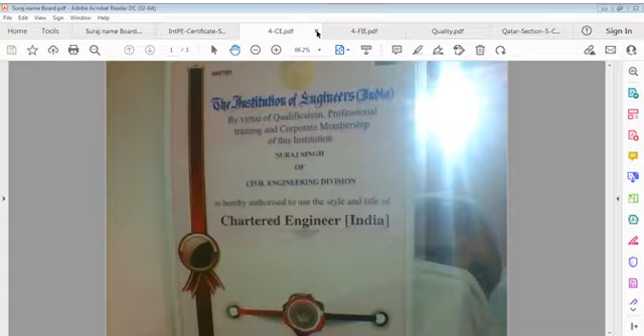I'm interested in people who are serious in life. This is a competency certificate, called the Professional Engineer Certificate at an international level, and this is the Chartered Engineer Certification, as well as fellow membership of the Institution of Engineers. I have explained this many times. We have the issue of quality in works, quality in life, and also concrete, the most important material in the world.

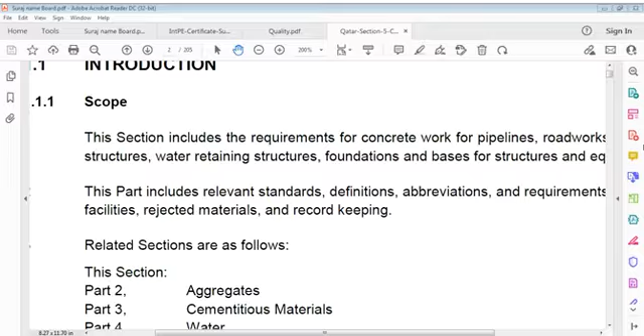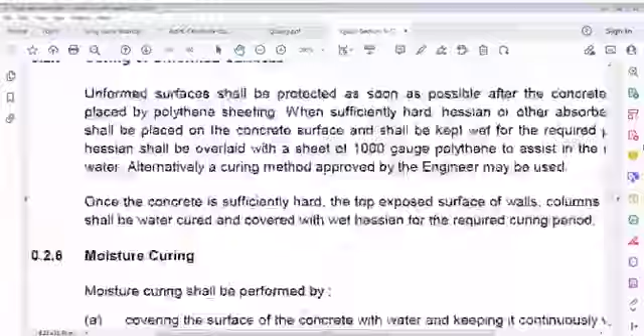Concrete, we have gone through many pages of this. This is very brief, in fact, not very explanatory yet. These are references, and they are important in this file. I think we were somewhere here, talking about some testing, water testing. We are going to reach there. We've gone to somewhere around 129 or 138.

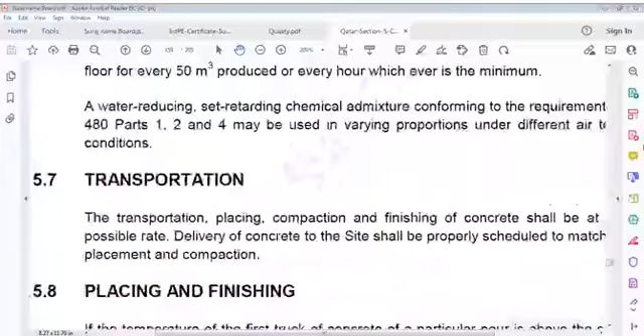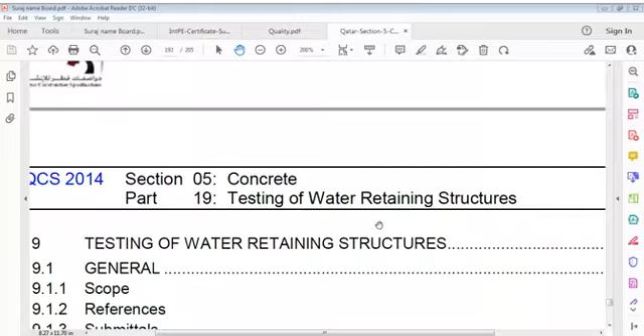I start with this because maybe we did something on this, but time has gone, and maybe I have to refresh that one. And it is grouting, etc. We have done, so leave it. Now I'm going to start with this page, 190. Alright, concrete testing of water retaining structures, and that's where we have to do concrete testing.

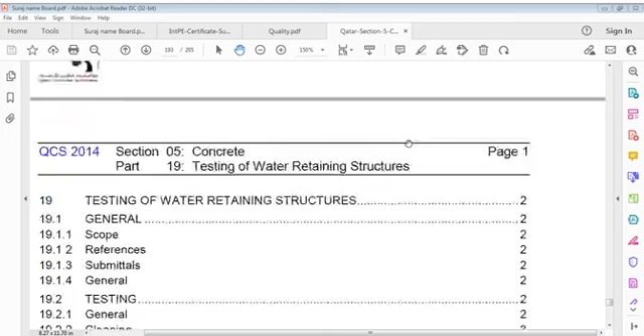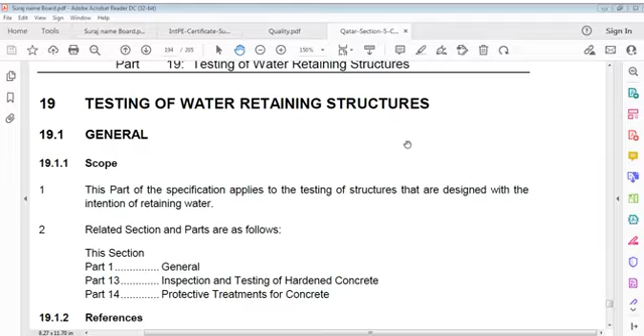In this, if you see the contents here, it's general: scope, references, submittals. In general testing: general, cleaning and testing procedures, walls, roofs, disposal of water used for testing. And of course here is general in this testing of water retaining structures. This part of the specification applies to testing of structures that are designed with the intention of retaining water, and the related sections are as follows.

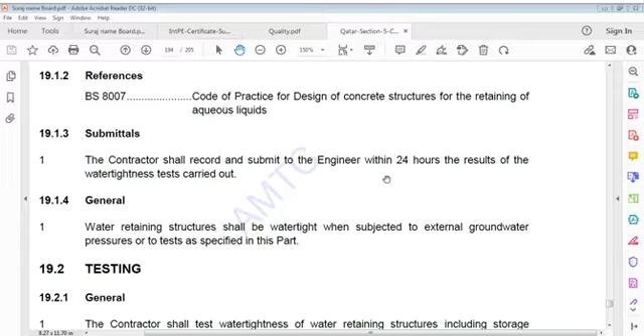You can say general inspection and testing of hardened concrete, protective treatments of concrete, and BS 8007, which is the code of practice for design of concrete structures for retaining aqueous liquids. Submittals: the contractor shall record and submit to the engineer within 24 hours results of water tightness tests carried out. General: water retaining structures shall be watertight when subject to external groundwater pressure or to tests as specified in this part. I'm just reading it because I explained it to you before, and if required I explain as such.

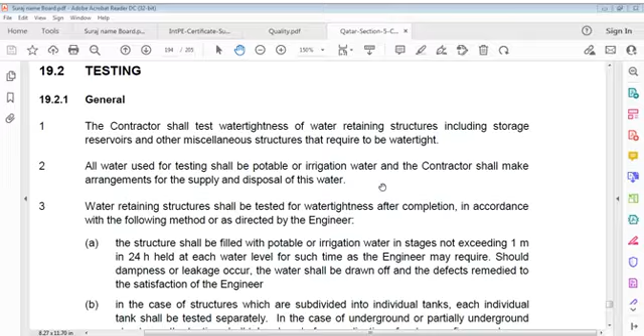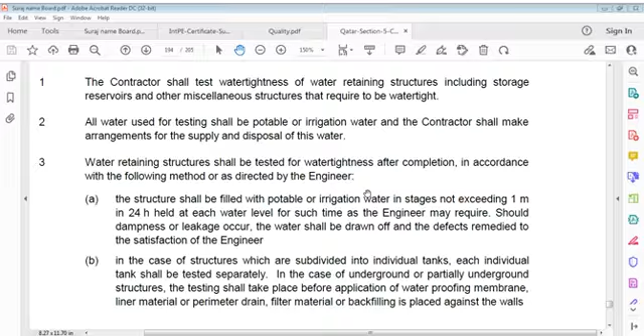The contractor shall test water tightness of water retaining structures, including storage reservoirs and other miscellaneous structures that require to be watertight. All water used for testing shall be potable or irrigation water, and the contractor makes arrangements for supply and disposal of this water. Water retaining structures are tested for water tightness after completion in accordance with the following method as directed by the engineer. You see, when I say directed, or something to be done with the engineer, you have to be clear about this.

Here engineer, again I repeat, does not mean site engineer. Engineer here is a designation, it's a contractual title. It's always mentioned in the contract. This means the engineer who is responsible for supervision of the job, who is responsible on behalf of the owner or client, who is responsible for finally authorizing work complete or an item complete or done according to requirements. It is that position. It's not something ordinary. It is, you can say, a legal position. So be careful about this when I say engineer.

A structure shall be filled with potable or irrigation water in stages not exceeding 1 meter in 24 hours. That is the limit. We should not fill the reservoir, that tank, more than 1 meter in 24 hours. And then it is held at each water level for such time as the engineer may require, and also as the codal requirement mandates. You have to see the code and read it. This is particularly BS 8007, or the equivalent Eurocode you can consider.

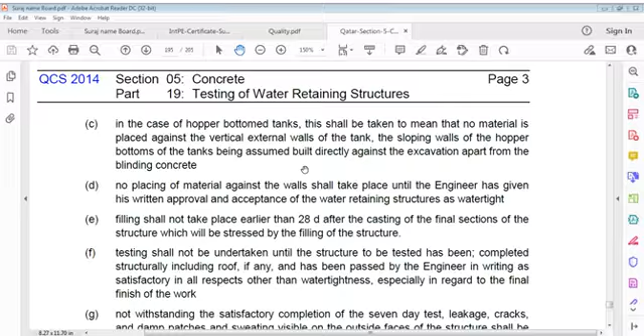Sloping walls of the hopper bottom of the tank are assumed built directly against the excavation, apart from blinding concrete. No placing of material against walls shall be effected until the engineer has given his written approval and acceptance that water retaining structures are watertight. Try to get this point. The engineer has to finally approve and accept the water retaining structures as being watertight.

Filling shall not be effected earlier than 28 days after casting of the final section of the structure. There is a 28-day requirement before filling is done. Filling shall not be effected earlier than 28 days after casting of the final section of structure which will be stressed by filling of the structure.

Testing shall not be undertaken until the structure to be tested has been completed structurally, including the roof if it has one, and been passed by the engineer in writing as satisfactory in all respects other than water tightness, especially in regard to the final finish of the work.

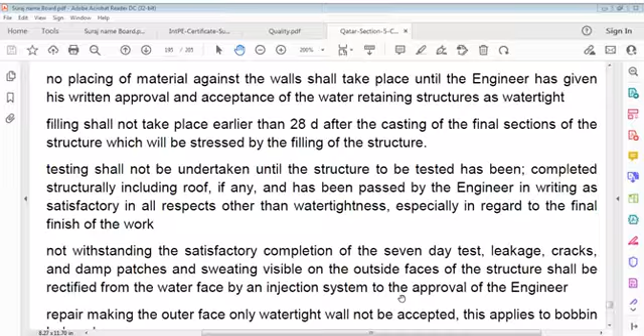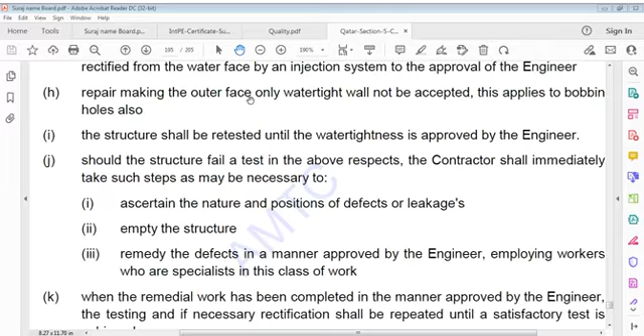Notwithstanding satisfactory completion of the 7-day test, leakage, cracks and damp patches visible on the outside faces of the structure shall be rectified from the water face by an injection system to the approval of the engineer. Repair making the outer face only watertight shall not be accepted. This applies to bobbin holes also. The structure shall be retested until water tightness is approved by the engineer.

Should the structure fail the test in the above respects, the contractor shall immediately take such steps as may be necessary to ascertain the nature and positions of defects or leakage. You have to make sure where the leakage exists. Empty the structure. Remedy defects in a manner approved by the engineer, employing workers who are specialists in this class of work.

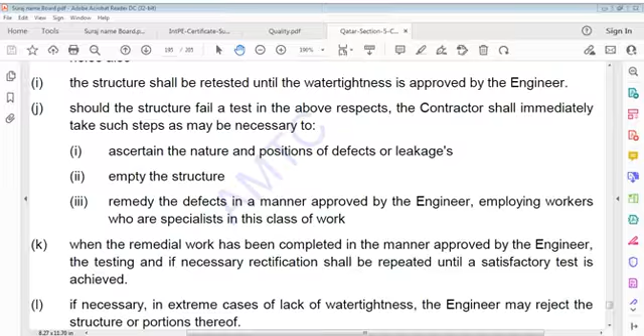Be clear, even after remedial action is effected, you have to test again. If there is another leakage, you have to do it again and again until you get a satisfactory test. In extreme cases of lack of water tightness, the engineer may reject the structure or portions thereof. Very serious matter. In case it is not found watertight, the engineer will reject it or a portion of it. Do it again.

And then we say cleaning. All water retaining structures shall on completion be carefully cleaned of all debris to the complete satisfaction of the engineer, as follows. This process is telling about cleaning for the purpose of testing.

All internal faces shall be brushed down with a stiff broom while still dry. Clean all the walls inside using a stiff brush. Whatever debris, even very minor pieces, remove them. And all associated reservoir pipe work shall be cleaned in accordance with the requirements.

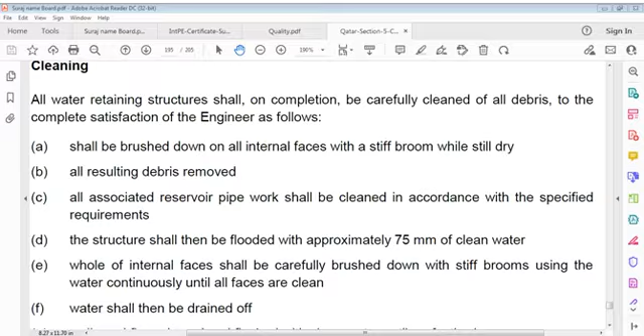The structure shall then be flooded with approximately 75 mm of clean water from the bottom. Fill it and you have to wash the walls and floors. All internal faces shall be carefully brushed down with stiff brooms using water continuously until all faces are clean. Water shall then be drained off, and walls and floors hosed and flushed with clean water.

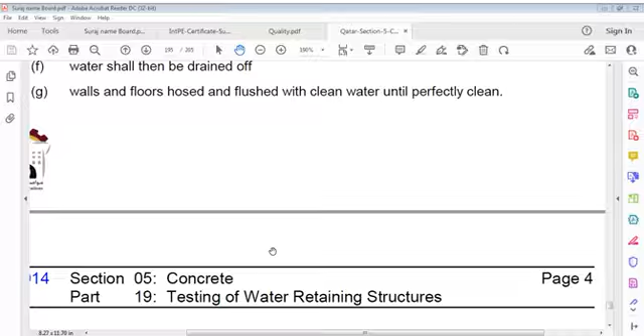After completion and cleaning of the structure and all associated pipe work, if it is there, the contractor shall fill the structure up to top water level and leave it for a stabilizing period of 21 days in order to allow absorption of water into concrete voids and autogenous healing to take effect.

This means complete saturation of the volume of concrete so there is no delay in transmission of water through these voids. So after cleaning the structure and associated pipe work, like in a swimming pool or treatment plant reservoirs, the contractor shall fill the structure up to top water level following the 1 meter in 24 hours principle and leave it for a stabilization period of 21 days, remember, 3 weeks, to allow for absorption and autogenous healing.

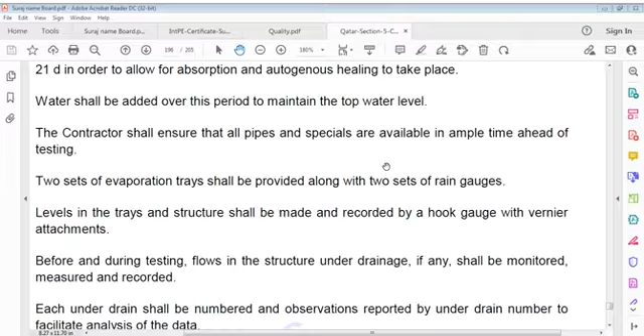Before and during testing, flows in structure under drainage, if it has, shall be monitored, measured, and recorded. Each under drain shall be numbered and observations reported by under drain number to facilitate analysis of data.

All leaks shall be repaired within 1 month of their detection. This is limiting period. On 22nd day, two shallow watertight evaporation trays. When we say on 22nd day, it is 21 days wait period, then 22nd day, two shallow watertight evaporation trays.

We talked of 21 days, that this is absorption and autogenous period. So we have to start testing on 22nd day. Two shallow watertight evaporation trays of area 0.4 meters square, let us say 1 meter by 0.4, or it can be some other size, like 0.8 by 0.5.

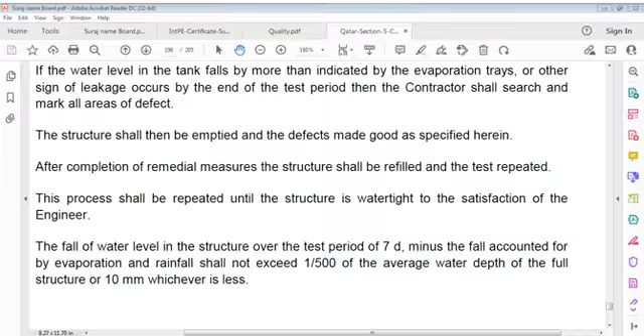Testing of water in structure. Roofs now. Roof of structure shall be tested for water tightness before laying of roof membrane. We are talking of roofs. It's not very complicated, however, but an interesting one because it is a water test ultimately. It's not a water retaining structure. It's a structure in that way only when there's rain and some water accumulates. So we are saying a water test for that is also important because water can penetrate down into the room below.

Roofs of structures shall be tested for water tightness before laying of roof membrane, which shall be guaranteed for about 10 years. Roof and fittings shall be hosed down vigorously, and this repeated in such a way as to keep the roof wet for 3 successive days.

Leaks or damp patches show in soffit. Soffit means the internal surface, or you can say the bottom surface of the slab. Roof and fittings shall be deemed satisfactory for water tightness if no discernible leaks or damp patches show in soffit. I repeat, roof and fittings shall be deemed satisfactory for water tightness if no discernible leaks or damp patches show in soffit.

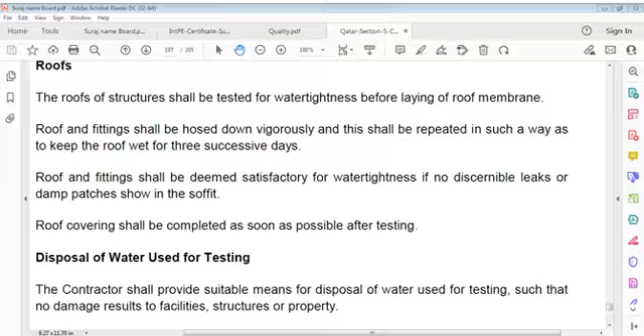Roof covering shall be completed as soon as possible after testing. Disposal of water used for testing. Contractor shall provide suitable means for disposal of water used for testing, such that no damage results to facilities, structure, or property. These means shall be subject to approval of engineer and local authorities. Details shall be submitted to engineer on request.

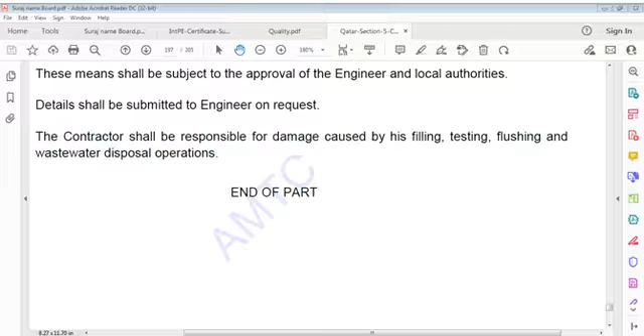Contractor shall be responsible for damage caused by its filling, testing, flushing, and wastewater disposal operations. That is the water testing we considered. So you should be very serious about this matter. Testing is very important. Now we come to part 20 of this specification, and that is personnel qualifications and certification.

In this we cover personnel qualifications: auditors, ready-mix concrete companies, technical department, production and operation department, testing laboratories, concrete laboratories department, contractors, concrete construction department, consultants, site supervision department, site supervision design office department.

Personnel qualifications and certifications. In general, qualification requirements given in this part are optional unless otherwise mentioned below. Purpose of qualifications is to prepare industry to cope with required quality of construction. Requirements shall become compulsory as and when stated by standards. So it is just their own proposal, but qualification is a requirement and it is not optional as far as I am concerned, but let us say it is a general statement.

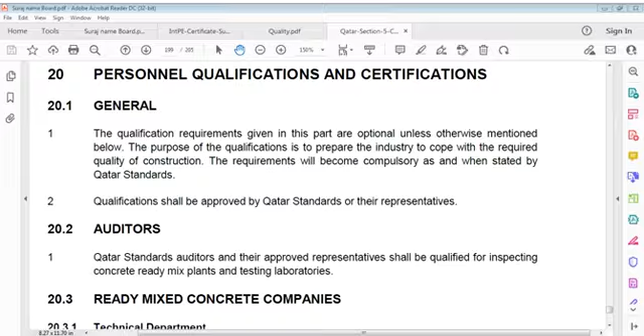So we are talking about RMCs first, how they should be qualified. It is ready-mix concrete companies, technical department, we are talking of now. What is the position? Number one, technical manager or QC manager. Now, what should be the qualification for the technical manager or QC manager?

Concrete specification review and concrete mixture proportioning. Concrete constituent materials, characteristics and effects on concrete properties. Fresh and hardened concrete properties. Durability of concrete. Production and delivery of ready mix concrete. Handling, placing and curing of concrete.

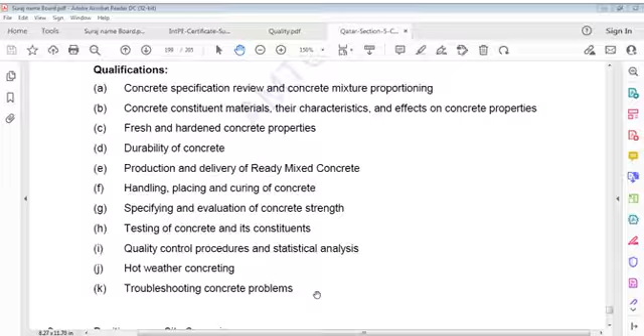Specifying and evaluation of concrete strength. Testing of concrete and its constituents. Quality control procedures and statistical analysis. Hot weather concreting. Troubleshooting concrete problems. This is for technical manager, QC manager, and actually this is like a job description related qualification: your technical manager, QC manager should know what the concrete specifications are and review them from time to time.

What is the concrete mixture proportion, say ingredients. They have designs of concrete ingredients, and that we have to keep reviewing because materials are never constant. They keep on changing from time to time. So that is what that design mix is.

How many kilograms of cement you have to use, and how many kilograms of cement you have to replace with supplementary cementing material like PFA, GGBS, or microsilica. That is called replacement of cement by these supplementary materials, so that concrete becomes more quality related, and cracks may be avoided using this pozzolanic material proportioning. And how many kilograms of water to be used, and how many kilograms of whatever else is required, maybe admixtures or plasticizers. All that is a part of specification.

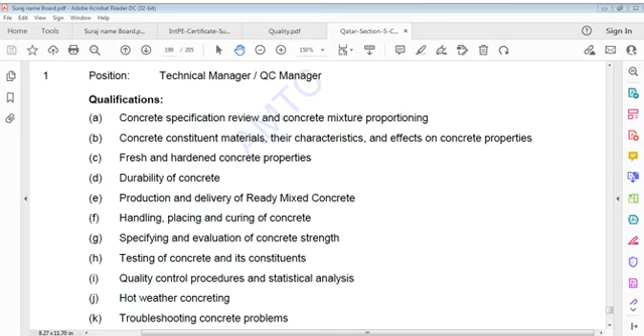Quality control procedures and statistical analysis. Hot weather concreting, these are very important points. Quality control procedures are involved with wet concrete, from fresh to hardened. Hot weather concreting, the temperature is most important, how to maintain it in hot weather conditions. Then troubleshooting concrete problems.

So what is the list? Again I say, concrete specification review and concrete mixture proportioning. Concrete constituent materials, their characteristics and effect on concrete properties. Fresh and hardened concrete properties. Durability of concrete. Production and delivery of ready-mix concrete. Handling, placing and curing of concrete. Specifying and evaluation of concrete strength. Testing of concrete and its constituents. Quality

Supervisor shall be capable of satisfactorily reading, understanding and performing below fresh concrete tests.

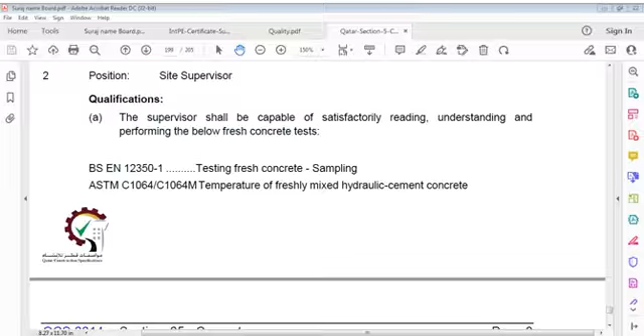Supervisor shall be capable of satisfactorily reading, understanding and performing below fresh concrete tests. What is testing fresh concrete? Sampling fresh concrete. You know the slump test, temperature, and air voids. We generally test all this. So testing fresh concrete, sampling, temperature of freshly mixed hydraulic cement concrete. Testing fresh concrete, slump test. Testing fresh concrete, density.

Testing hardened concrete, making and curing specimens for strength tests. Standard test method for slump flow of self-consolidating concrete. Self-consolidating means there is no requirement of applying a vibrator. Automatically it settles and densifies. There is no need of compaction in this case. Actually, they call it self-consolidation, but it's actually self-compaction.

Now, the position is laboratory supervisor. Laboratory supervisor is a technician in the laboratory, and it's a very important, technical position. Hold on. Lab supervisor. Qualification is lab supervisor shall be capable of satisfactorily reading, understanding, and performing these fresh and hardened concrete tests.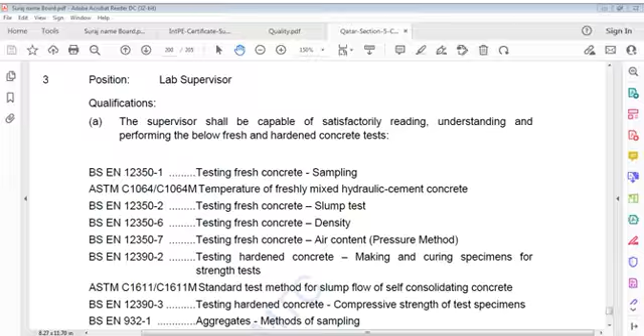Method of sampling, and in that same way you can say the methods of reducing laboratory samples, and determination of particle size distribution and dust content. This is for aggregate: the method of reducing laboratory samples and determination of particle size distribution and dust content.

Aggregates, determination of particle density and water absorption. And aggregates, also determination of loose bulk density and voids. Method of determination of moisture content. So how many points are there? Let us see, because it is for the laboratory one. Here

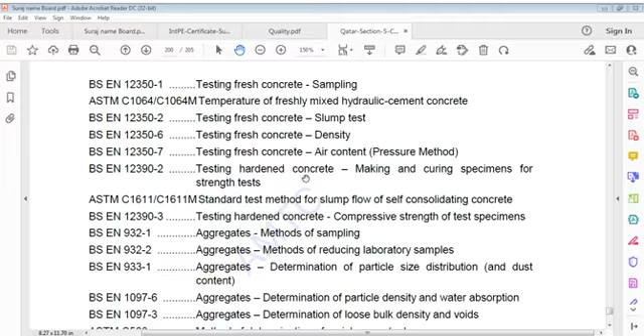you can say testing fresh concrete sampling, temperature of freshly mixed hydraulic cement concrete, testing fresh concrete slump test and density, testing fresh concrete air content pressure method, testing hardened concrete making and curing specimens for strength test, and standard test method for slump flow of self-consolidating concrete, testing hardened concrete compressive strength of test specimens, aggregates method of sampling,

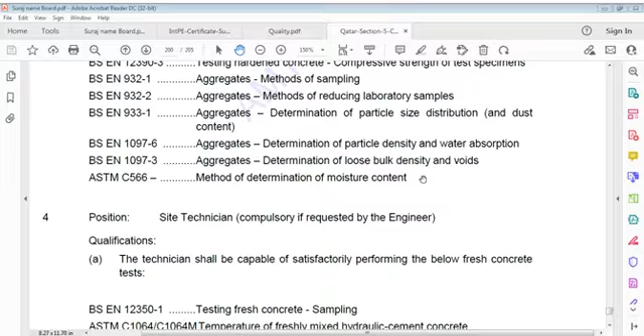aggregates method of reducing laboratory samples, aggregates determination of particle size distribution and dust content, aggregates determination of particle density and water absorption, aggregates determination of loose bulk density and voids, and method of determination of moisture content.

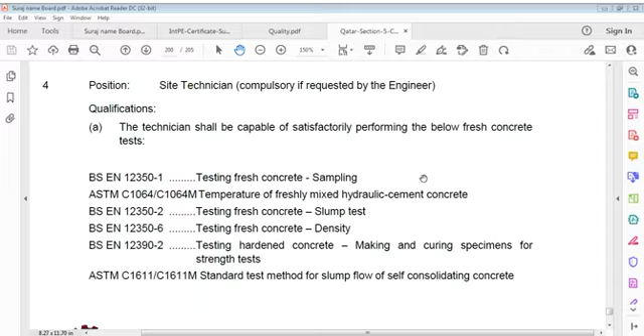Again, this is the site technician, compulsory if requested by the engineer. The technician shall be capable of satisfactorily performing the below fresh concrete tests. What's that? Now which site was that? A site technician, compulsory if requested by the engineer, and his qualification: the technician shall be capable of satisfactorily performing the below

fresh concrete tests, and that is testing fresh concrete sampling, temperature of freshly mixed hydraulic cement concrete, testing fresh concrete slump test, testing fresh concrete density, testing hardened concrete making and curing specimens for strength test, and standard test method for slump flow of self-consolidating concrete.

Then lab technician, compulsory if requested by the engineer, and the qualification is: the technician shall be capable of satisfactorily performing the below fresh and hardened concrete tests, and that is the lab technician. Testing fresh concrete, right? So the technician shall be capable of satisfactorily performing these tests, fresh concrete tests and hardened concrete tests: testing fresh concrete

sampling, again temperature of freshly mixed hydraulic cement concrete, testing fresh concrete slump test, testing concrete density, testing fresh concrete air content pressure method, testing hardened concrete making and curing specimens for strength test, standard test method for slump flow of self-consolidating concrete, testing hardened concrete compressive strength of test specimens,

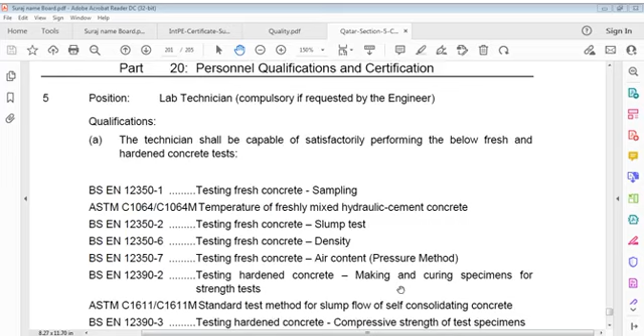and aggregates method of sampling, aggregates method of reducing laboratory samples, aggregates determination of particle size distribution and dust content, aggregates determination of particle density and water absorption, aggregates determination of loose bulk density and voids, method of determination of moisture content. Now we have the operation department.

Operation department, production and operation department, and the position is plant production or operation manager and/or supervisor or performer, whose qualification says he should have knowledge of properties of concrete and its constituents, materials management, organization, plant design,

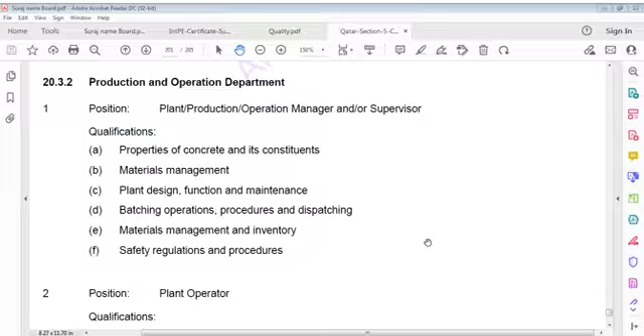function and maintenance, batching operations, procedures and dispatching, materials management or materials organization management and inventory, and safety regulations and procedures. And let's see, what's that? Plant operator. And what should be the qualification of that plant operator? Let's see what it says.

Plant operator: basic concrete properties and characteristics of its constituents, that is the job of the plant operator. Basic concrete properties and characteristics of its constituents, scales, meters and batching sequence and control system, central mixing and discharging, tolerances, overweight, underweight controls.

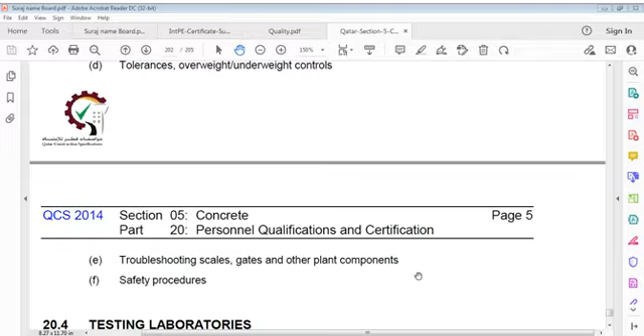Troubleshooting scales, gates and other plant components, safety procedures. So for plant operators it is basic concrete properties and characteristics of constituents, scales, meters, batching sequence and control system, central mixing and discharging, tolerance, overweight, underweight controls, troubleshooting scales, gates and other plant components, and safety procedures.

And now testing laboratory. Testing laboratory, concrete testing department. It has a concrete testing department. The position is laboratory manager or QC manager. Concrete specification review, as we said before, and concrete mixture proportioning. Concrete constituent materials, characteristics and effects on concrete properties.

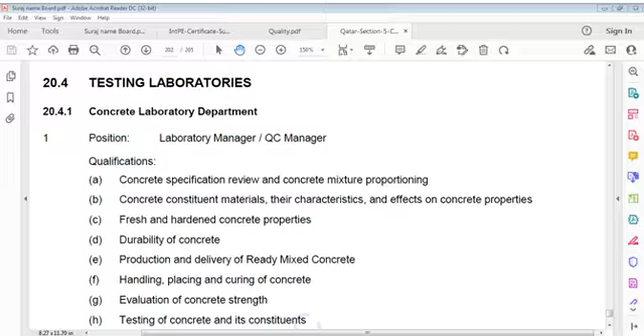Fresh and hardened concrete properties, durability of concrete, production and delivery of ready-mix concrete, handling, placing and curing of concrete, evaluation of concrete strength, testing of concrete and its constituents, quality control procedures and statistical analysis, hot weather concreting, troubleshooting concrete problems. Same list here as before, so no problem. That was the batching plant, now it's the laboratory. So I repeat again, it's a very important one.

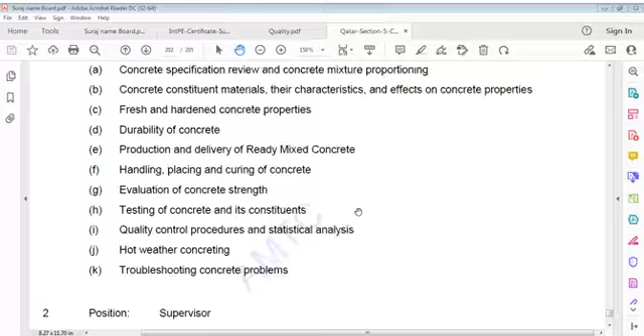Concrete specifications review and concrete mixture proportioning, concrete constituent materials, characteristics and effects on concrete properties, fresh and hardened concrete properties, durability of concrete, production and delivery of ready-mix concrete, handling, placing and curing of concrete, evaluation of concrete strength, testing of concrete and its constituents, quality control procedures and statistical analysis, hot weather concrete, troubleshooting concrete problems, and that troubleshooting is very important here.

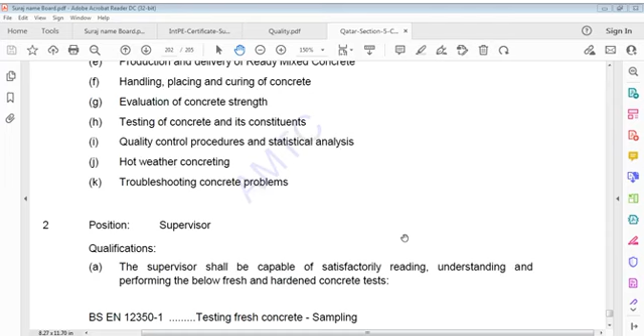Troubleshooting concrete problems. If we go further, then the supervisor position: supervisors shall be capable of satisfactorily reading, understanding and performing the below fresh and hardened concrete tests. These are testing fresh concrete: sampling, temperature of freshly mixed hydraulic cement concrete, slump test, density, air content pressure method; testing hardened concrete: making and curing specimens for strength test.

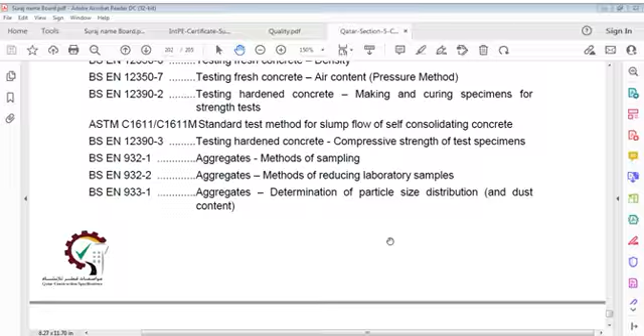Standard test method for slump flow of self-consolidating concrete, testing hardened concrete compressive strength of test specimens, aggregates method of sampling, aggregates method of reducing laboratory samples, aggregates determination of particle size distribution and dust content, determination of particle density and water absorption, determination of loose bulk density and voids, and method of determination of moisture content.

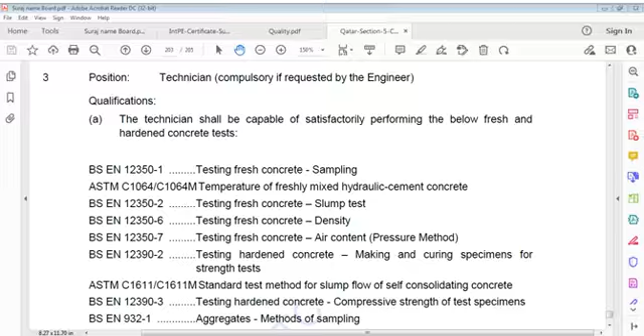And now a technician is also compulsory here, requested by the engineer, and the technician should be capable of satisfactorily performing the below fresh and hardened concrete tests: testing fresh concrete sampling, temperature of freshly mixed hydraulic cement concrete, slump test, density, air content, and testing hardened concrete, making and curing specimens for strength test. Standard test methods for slump flow of self-consolidating concrete, compressive strength of test specimens, aggregates method of sampling.

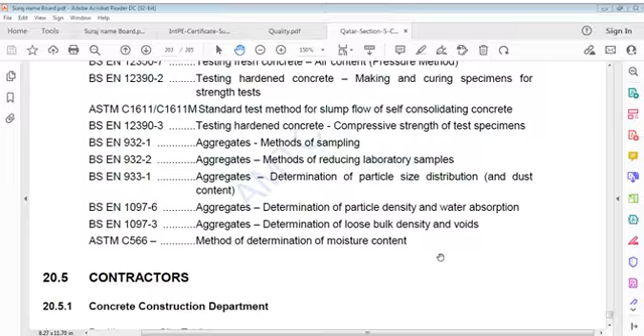The aggregates methods of reducing laboratory samples, determination of particle size distribution and dust content, particle density and water absorption, loose bulk density and voids of aggregates, and method of determination of moisture content. And now the contractor: concrete construction department, site engineer.

The site engineer shall be capable of satisfactorily reading, understanding, and performing these fresh concrete tests: sampling, temperature of freshly mixed hydraulic cement concrete, slump test, density, air content pressure method, testing hardened concrete strength, making and curing specimens for strength test, and standard test methods for slump flow of self-consolidating concrete.

QC manager, QC engineer, material engineer. What should they be qualified for? Minimum: concrete specification review and concrete mixture proportioning, concrete constituent materials, respective characteristics and effects on concrete properties, fresh and hardened concrete properties, durability of concrete, production and delivery of ready-mix concrete, handling, placing and curing of concrete, specifying and evaluating concrete strength, testing of concrete and constituents, quality control procedures and statistical analysis, hot weather concrete, troubleshooting.

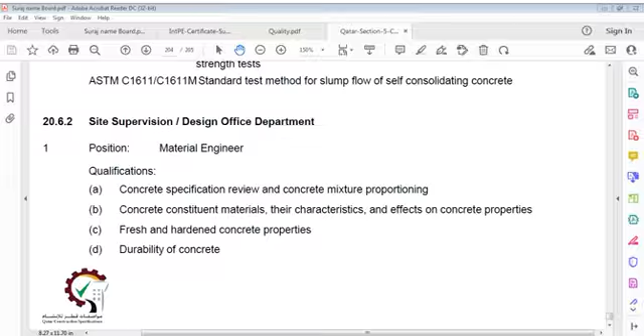And then production and delivery of ready-mix concrete, handling, placing and curing of concrete, specifying and evaluation of concrete strength, testing of concrete and its constituents, quality control procedures and statistical analysis, hot weather concreting, troubleshooting concrete problems.

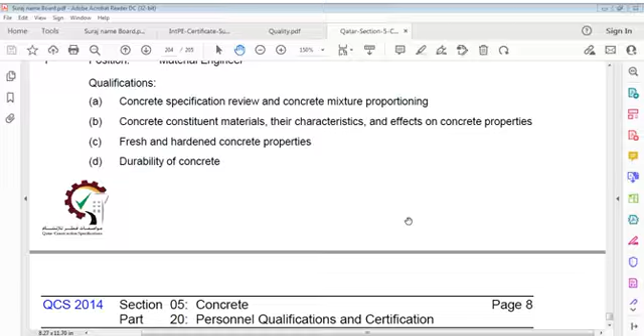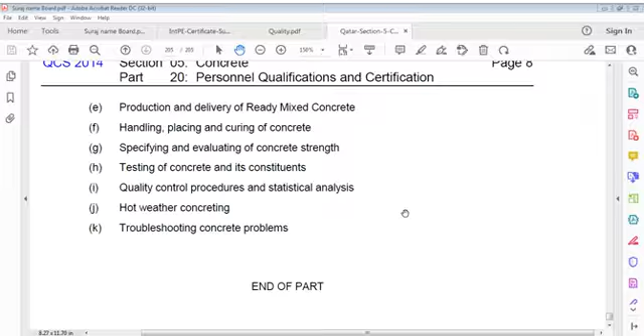And these are, again I repeat, important requirements for a material engineer: concrete specification review and concrete mixture proportioning, concrete constituent materials, their respective characteristics and effects on concrete properties, fresh and hardened concrete properties, durability of concrete, production and delivery of ready-mix concrete, handling, placing and curing of concrete, specifying and evaluating concrete strength, testing of concrete and its constituents, quality control procedures and statistical analysis, hot weather concreting, troubleshooting concrete problems.

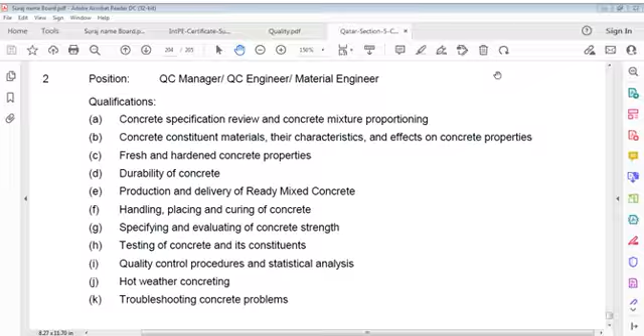Material engineer, what should they do? Concrete specification review and concrete mixture proportioning, concrete constituent materials, their respective characteristics and effects on concrete properties, fresh and hardened concrete properties, durability of concrete, production and delivery of ready-mix concrete, handling, placing and curing of concrete, specifying and evaluating concrete strength, testing of concrete and its constituents, quality control procedures and statistical analysis, hot weather concreting, troubleshooting concrete problems. And likewise, we have gone through this concrete chapter.

I was a little interested in something which is very uncommon, you can say. Now, what are cold weather concrete precautions, best practices for cold weather concreting? Jack Holley webinar series: letting concrete freeze, placing concrete on frozen ground, sending concrete out at improper temperature, not monitoring temperatures constantly, improper placing and finishing, increase cement, reduce supplementary cementitious material. It is about best practice. I'm talking of cold weather concreting.

This is a very important one also: environmental factors like hot and cold weather affect concrete properties and construction operations of mixing, transporting, and placing of concrete materials. By understanding how these factors affect placing and curing of concrete, producers can adjust mix designs and compensate in a variety of other ways to maintain high quality standards and avoid issues with the finished product. Jack Holley, a concrete quality control veteran of 45 years, shares experience and recommends best practice for hot and cold weather conditions in a two-part webinar series. So it's some reference.

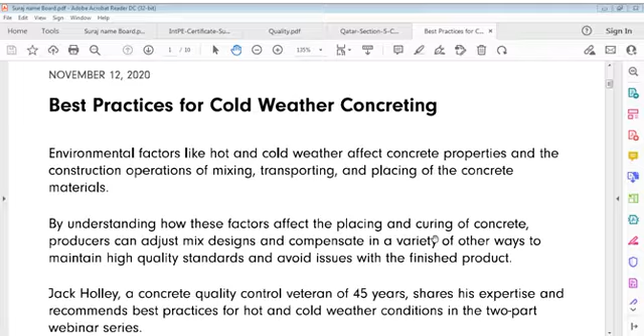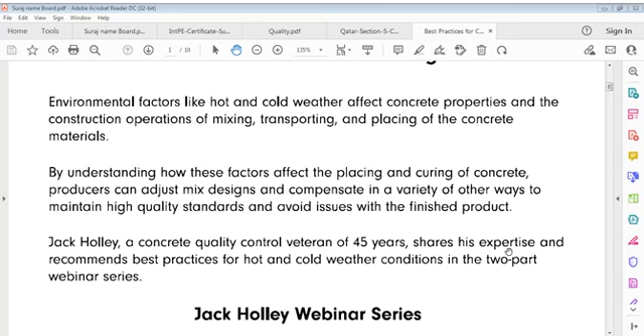I browsed in, best practices for cold weather concreting. This website is CarbonCure, and this is best practice for cold weather concrete, November 12, 2020, 2 years back. As I said, environmental factors like hot and cold weather affect concrete properties and construction operations of mixing, transporting, and placing of concrete materials. By understanding how these factors affect placing and curing of concrete, producers can adjust mix designs and compensate in a variety of other ways to maintain high quality standards and avoid issues with the finished product.

And its concrete quality. As I said, the American Concrete Institute (ACI) defines cold weather concreting as a period when average daily ambient temperatures are expected to fall below 5 degrees Celsius for more than 3 successive days, where average daily temperature is the average of the highest and lowest temperature during the period from midnight to midnight, and when temperatures below 10 degrees Celsius occur during more than half of any 24-hour duration.

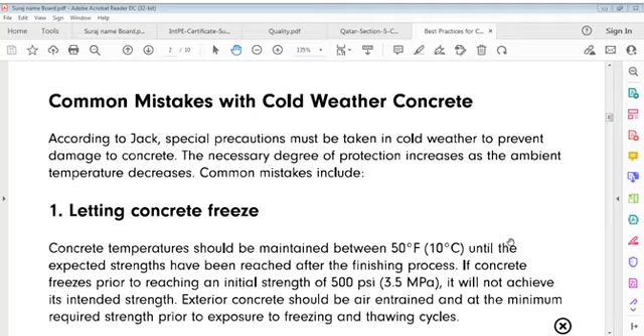That period shall be regarded as cold weather. Cold weather concreting is when average daily temperature falls below 5 degrees Celsius for more than 3 successive days. Common mistakes with cold weather concrete: special precautions must be taken in cold weather concreting to prevent damage to concrete, and the necessary degree of protection increases as ambient temperature decreases. These are the mistakes which

people do. Letting concrete freeze, that's a mistake. Common mistakes include letting concrete freeze. Concrete temperatures should be maintained above 10 degrees Celsius until expected strengths have been reached after the finishing process.

If concrete freezes prior to reaching an initial strength of 3.5 MPa, it shall not achieve its intended strength. This is the condition here, 3.5 MPa. If concrete freezes prior to reaching an initial strength of 3.5 MPa, it shall not achieve its intended strength.

Exterior concrete should be air entrained and at minimum required strength prior to exposure to freezing and thawing cycles.

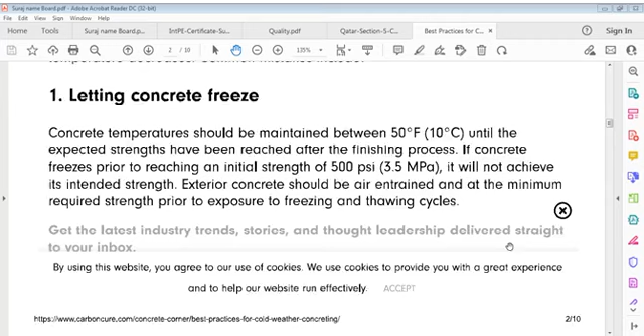Then number 2 is missing, I think, no issue. Let's say one more thing. Fresh concrete closer to the ground shall cure slower than the surface, meaning the top of your slab sets while the bottom stays soft, resulting in surface defects like cracking or crusting.

Sending concrete out at improper temperature. The need for proper planning in cold weather cannot be overstated. According to this requirement, concrete should arrive at the site on time, and from a production standpoint, water and aggregate should be heated to maintain proper temperature. Very important point: water and aggregate should be heated to maintain proper temperature.

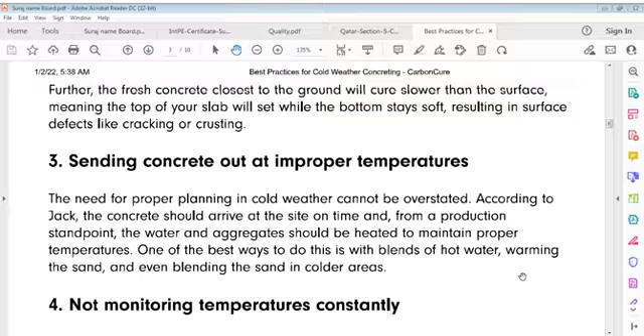One of the best ways to do this is with blends of hot water, warming sand, and even blending sand in colder areas. Not monitoring temperature constantly. These are all mistakes we are talking about. You got the point?

Mechanical and personnel resources should be on site to monitor temperatures at all times. One of the best ways to do it is with a temperature calculator from ACI. Take the temperature of all materials, calculate the output temperature of the concrete, target your water temperatures, and make other adjustments.

There are temperature sensors available today that can be easily installed in concrete as it is placed. These sensors can send data wirelessly so you can monitor and foresee potential issues or changes in set time. Again I repeat, this is temperature control, monitoring temperature constantly.

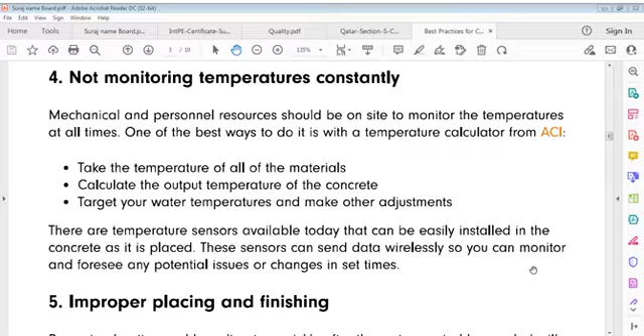Mechanical and personnel resources should be on site to monitor temperatures at all times. The best way to do it is with a temperature calculator. Take the temperature of all materials, calculate the output temperature of the concrete, target your water temperature, and make other adjustments. Temperature sensors are available today that can be easily installed in concrete as it is placed, and they can send data wirelessly so you can monitor and foresee potential issues or changes in set times.

Improper placing and finishing. Removing heating and hoarding too quickly after the curing period has ended shall cause rapid cooling of outer surfaces and create a thermal differential within the placement. There are recommended time limits that can be referred to through the Portland Cement Association.

Create a thermal differential within the placement. There are recommended time limits that can be referred to through the Portland Cement Association, ACI and other industry bodies. If those limits are exceeded, there's a high possibility that structures crack due to the differential in temperature. Continue to monitor until differentials are equalized or at a small enough number that they won't create stresses within the placement.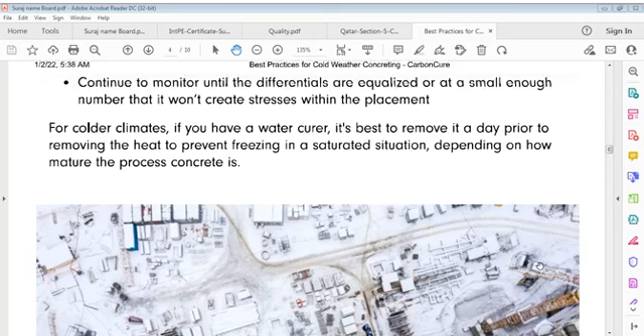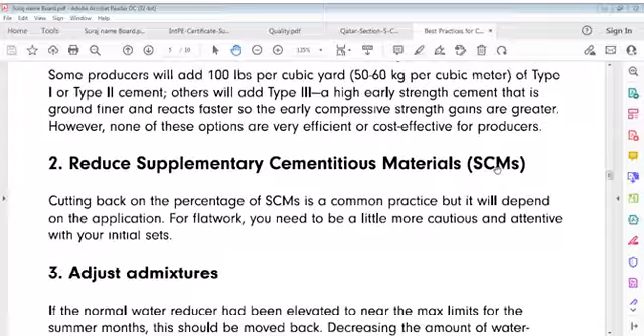Concrete mix design adjustment in cold concrete, and that is here. The recommendation is examining mix designs and making adjustments as you come into fall season, to help with cold weather concreting. The following are some: adjust admixtures, reduce supplementary cement.

Before that, some producers add 50 to 60 kilograms per cubic meter of type 1 or type 2 cement. Others add type 3, a high early strength cement that is ground finer and reacts faster, so early compressive strength gains are greater. However, none of these options are very efficient or cost effective for producers.

So what it says: 50 to 60 kg per cubic meter of type 1 or type 2 cement. Others add type 3, a high early strength cement that is ground finer and reacts faster, so early compressive strength gains are greater. However, none of these options are very efficient or cost effective for producers.

Reduce supplementary cementitious materials. Cutting back on the percentage of SCMs is a common practice, but it depends on the application. For flat work, you need to be a little more cautious and attentive with your initial sets. So, adjust admixtures.

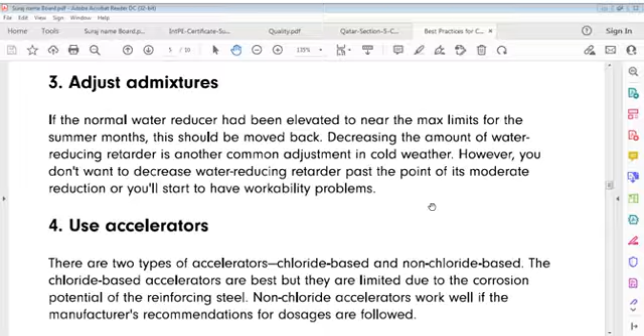Another common adjustment in cold weather. However, you don't want to decrease the water reducer retarder past the point of moderate reduction, or you start to have workability problems. Use accelerators. There are two types of accelerators, chloride based and non-chloride based. Chloride based accelerators are best, but they are limited due to corrosion potential of reinforcing steel. Non-chloride accelerators work well if manufacturers' recommendations for dosages are followed.

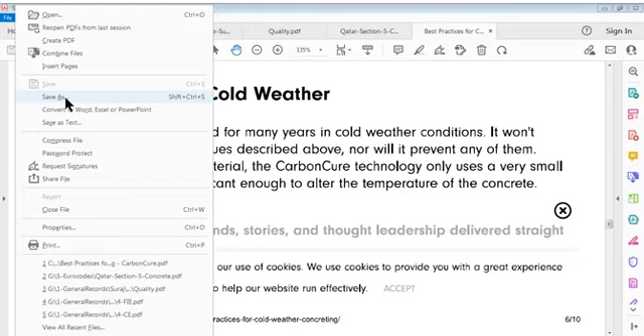CarbonCure and cold weather. Let me save this file also for future reference, so that it is used and referred to. Let me see, cold weather concrete, general records, concrete specifications. Where is this? I don't know. Storage and management documents, yes. Where is that? Okay, I'll paste it somewhere here now.

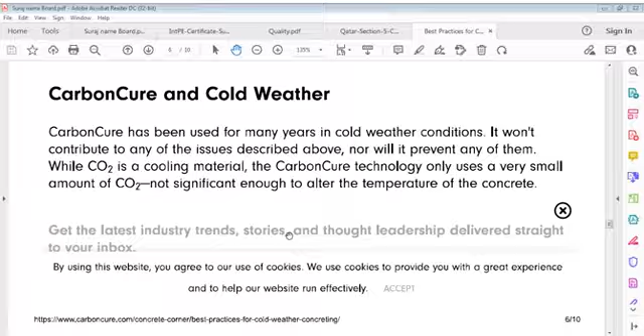CarbonCure has been used for many years in cold weather conditions. It won't contribute to any of the issues described above, nor will it prevent any of them. While carbon dioxide is a cooling material, CarbonCure technology only uses a very small amount of carbon dioxide, not significant enough to alter the temperature of concrete.

It says cold weather concrete and best practices for cold weather concrete, Carbon cure. Then there's cement.org, cold weather concrete, Portland Cement Association. Let's go one by one, it's better. Carbon cure, best practice for cold weather concrete. No, it's not. Let's go to cement.org. Cold weather concrete, what cement.org says. Let's see.

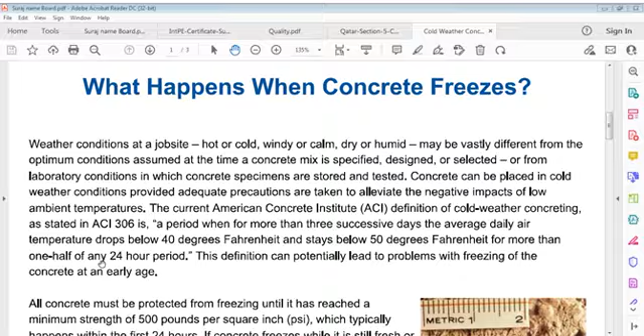What happens when concrete freezes? It's another website, and I'm just trying to refer to it because it's also very important, though it's not applicable in Gulf countries, nor in most of my country, only in some parts like Jammu, Kashmir, Shimla. What happens when concrete freezes? It's an important point here. Weather conditions at a job site.

Weather conditions at a job site: hot or cold, windy or calm, dry or humid, may be vastly different from optimum conditions assumed at the time the concrete mix is specified, designed or selected, or from laboratory conditions in which concrete specimens are stored and tested. Concrete can be placed in cold weather conditions provided adequate precautions are resorted to, to alleviate negative impacts of low ambient temperatures.

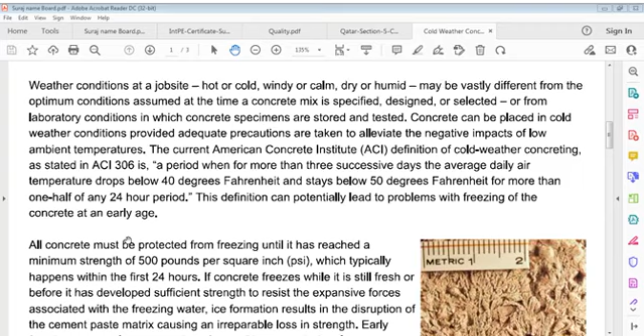All concrete must be protected from freezing until it has reached a minimum required strength, which typically happens within the first 24 hours. If concrete freezes while it is still fresh or before it has developed sufficient strength to resist expansive forces associated with freezing water, ice formation results in disruption of the cement paste matrix, causing an irreparable loss in strength. Early freezing can result in a reduction of up to 50% in ultimate strength.

Once concrete has attained a compressive strength of around 500 psi, it is generally considered to have sufficient strength to resist significant expansion and damage if frozen. Whenever the temperature at the time of concrete placement is below 40 degrees Fahrenheit and freezing temperatures within the first 24 hours after placement are expected, temperature as delivered.

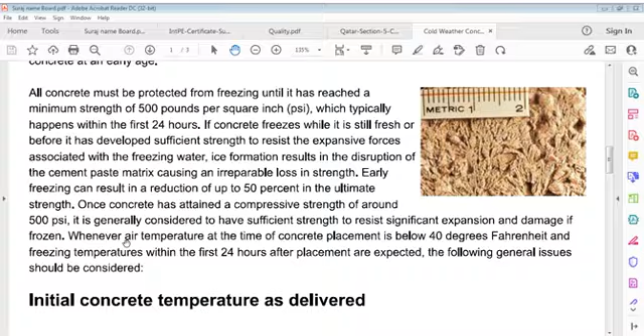During cold weather, it may be necessary to heat one or more of the concrete materials, water and/or aggregate, to provide proper concrete temperature as delivered. Due to the quantities and heat capacity of cement, using hot cement is not an effective method of raising initial concrete temperature.

Protection while concrete is placed, consolidated and finished. Exposure of concrete to cold weather shall extend the time required for it to reach initial set, which may require finishing crews to be available for a longer period. Depending on actual ambient temperatures, protection of concrete placement may require use of windbreaks, enclosures, or supplementary heat. It may also be appropriate to adjust

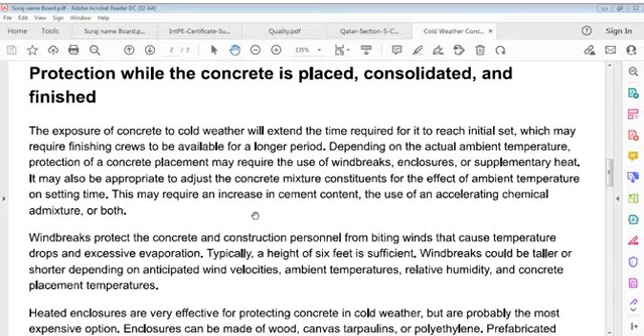Heated enclosures are very effective for protecting concrete in cold weather, but are probably the most expensive option. Enclosures can be made of wood, canvas, tarpaulins, or polyethylene. Prefabricated rigid plastic enclosures are also available. Three types of heaters are used in cold weather construction: direct fired, indirect fired, and hydronic systems.

To avoid carbonation of fresh concrete surfaces, indirect fired heaters should be used. If concrete is not exposed to the heater or exhaust directly, a direct fired heater is suitable. Caution should be taken to ensure that workers are not overexposed to carbon monoxide any time a heater is used inside an enclosure.

Hydronic systems transfer heat by circulating a glycol water solution in a closed system of pipes or hoses. Typical applications for hydronic systems include thawing and preheating subgrades and heating areas that are too large to be practical for an enclosure. Quality concrete.

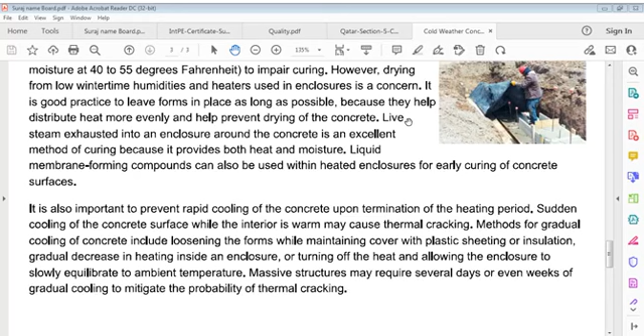It's also important to prevent, let me say, just a minute. Hold on, I think I missed something here. Load of structure, permit load of structure, and here is.

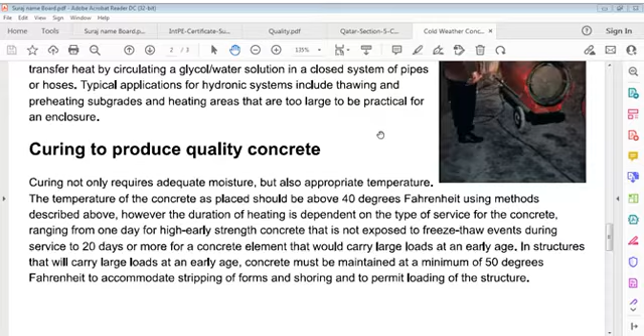In no case should concrete be allowed to freeze during first 24 hours after it has been placed. Since cement hydration is an exothermic reaction, concrete mixture produces some heat on its own. Protecting heat from escaping using polyethylene sheeting or insulating blankets may be all that is required for good concrete quality. More severe temperatures may require supplemental heat.

Again, I say in no case should concrete be allowed to freeze within 24 hours of its placement. Since cement hydration is an exothermic reaction, concrete mixture produces some heat of its own. Protecting that heat from escaping using polyethylene sheeting or insulating blankets may be all that is required for good concrete quality. More severe temperature may require supplemental heat.

Concrete retained in forms or covered with insulation seldom loses enough moisture to impair curing. However, drying from low wintertime humidities and heaters used in enclosures is a concern. It's a good practice to leave forms in place as long as possible, because they help distribute heat more evenly and help prevent drying of concrete.

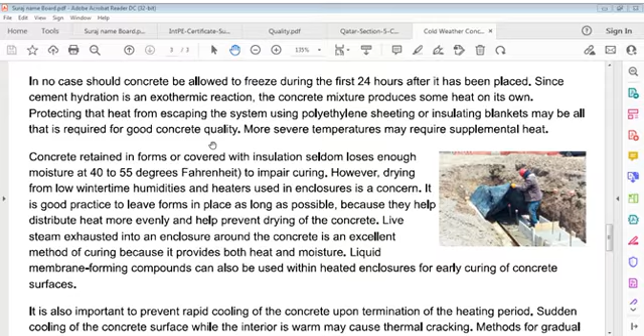Live steam exhausted into an enclosure around concrete is an excellent method of curing because it provides both heat and moisture. Liquid membrane forming compounds can also be used within heated enclosures for early curing of concrete.

Upon termination of heating period, sudden cooling of concrete surfaces while interior is warm may cause thermal cracking. Methods for gradual cooling of concrete include loosening of forms while maintaining cover with plastic sheeting or insulation, gradual decrease in heating inside the enclosure, or turning off heat and allowing enclosure to slowly equilibrate to ambient temperature. Massive structures may require several days or even weeks of gradual cooling

to mitigate probability of thermal cracking. It's also important to prevent rapid cooling of concrete upon termination of heating period. Sudden cooling of concrete surface while interior is warm may cause thermal cracking. Methods for gradual cooling include loosening of forms while maintaining cover with plastic sheeting or insulation, gradual decrease in heating inside enclosure, or turning off heat and allowing enclosure to slowly equilibrate to ambient temperature. Massive structures may require several days or even weeks of gradual cooling to mitigate probability of thermal cracking.